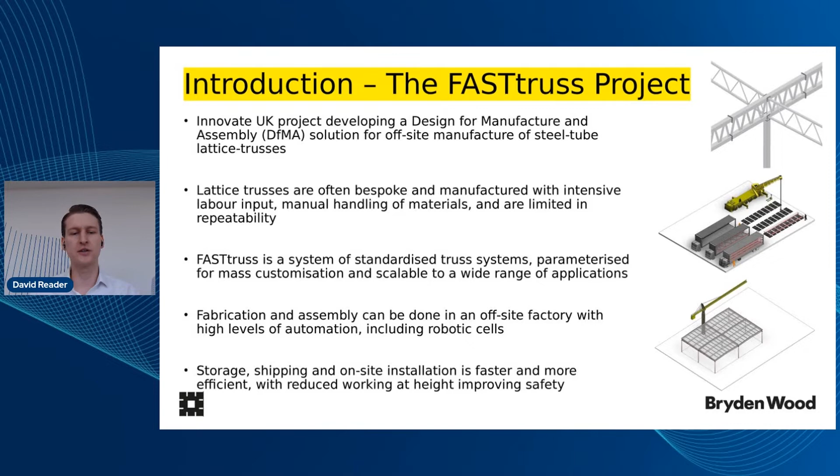What this means is that fabrication and assembly of these products can be done in off-site factories with higher levels of automation than you typically find in construction, including things like robotic cells. It also means that the storage, shipping, and on-site installation is faster and more efficient, with other benefits such as reduced working at height, so it improves things like safety.

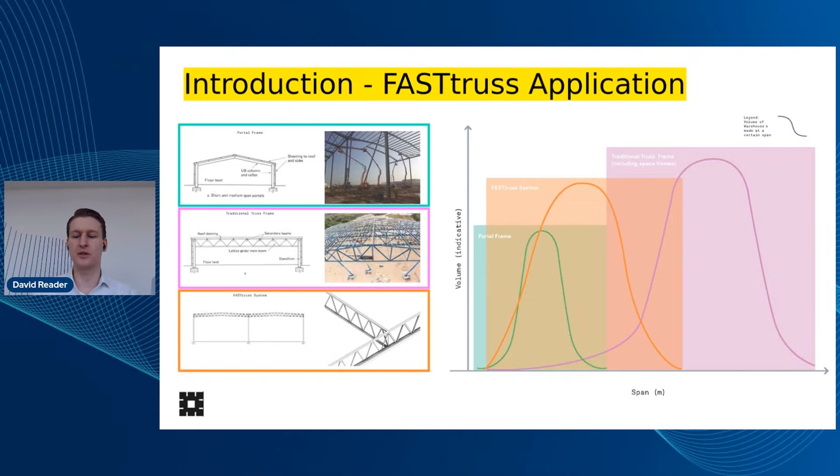So talking a bit about the application for this system, where it sits in the market. There are a few different types of systems already out there, things you'll see on the left, say a portal frame or a traditional truss system, and they cover varying spans of the market. FASTtruss sits somewhere over the portal frame area, and it covers a bit of a gap in the market. It covers a wide span of buildings, and actually, a lot of the market can be covered with products such as this.

As I previously mentioned, this is a collaboration between Tata Steel, a global steel producer, with lots of other projects such as this; Bryden Wood, a global multidisciplinary construction design consultancy; and the University of Sheffield Advanced Manufacturing Research Center, which does a lot of this research with manufacturing collaborators.

So let's talk a bit about why FASTtruss is important and how automation is transforming this industry. Construction industry productivity has had really little improvement for decades, whereas other sectors have had huge improvements in efficiencies. It's typically slow to adopt new processes and technologies, including simulation. Traditionally everything is focused on site, using bespoke elements, bespoke processes, bespoke workflows. This means there's poor efficiency and an inability to repeat and scale anything that happens.

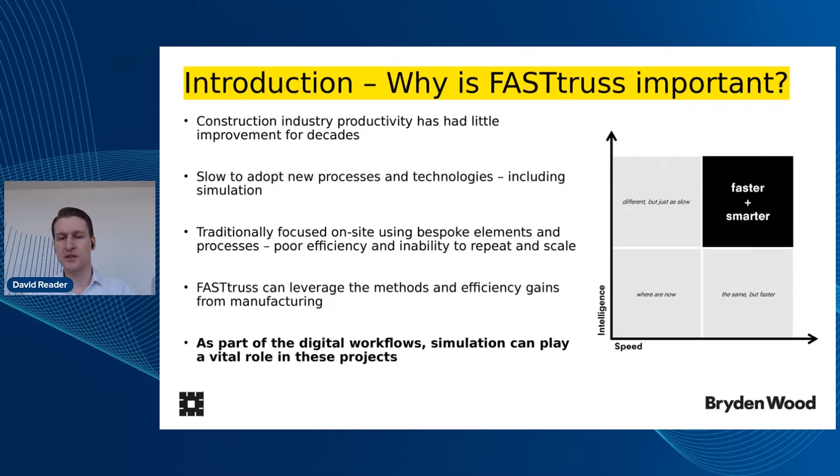So projects like FASTtruss can leverage methods and efficiency gains from sectors like manufacturing. And this is really great. It can transform the construction industry and change the way that projects and components are delivered. As part of these digital workflows in the design, we believe that simulation can play a vital role. So we want to be faster and smarter. Not the same thing, but faster, or not just different and just as slow.

So when we're talking about simulation, why would we choose AnyLogic? Basically, in collaboration with Tata Steel and the AMRC, we developed a simulation of the factory system. We chose AnyLogic as the software because its built-in libraries provide a fast and flexible platform for development, which is really important for us, especially the rapid building of simulations. The simulation is built using knowledge from existing mathematical models, and this allowed further dynamic analysis. As we said before, we believe simulation is a core approach in the future of the construction industry.

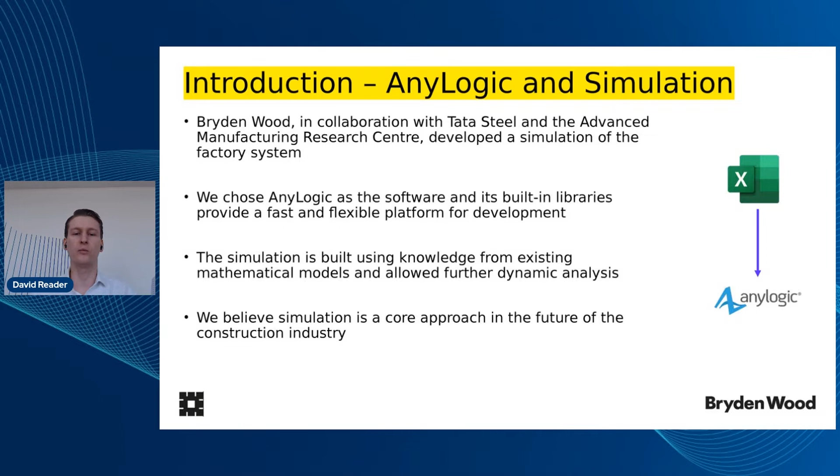Traditionally, a lot of work is done with static models, static spreadsheets, Gantt charts, tacit knowledge, intuition. What we want to do is change that, and we believe that simulation and tools like AnyLogic can really build on that knowledge and become a core part of the tools in the future. So where we want to make an impact, and where we do make an impact in these projects, is trying to be at the early stage. Traditional projects or conventional approaches don't test many options.

They take a long time to do it. They don't iterate much. Then there's not a lot of feedback in the process. Whereas for our approach, or what we try to do with clients, which is kind of like the design to value methodology, is we create lots of options, help clients make choices, connect client requirements with resulting outcomes and solutions.

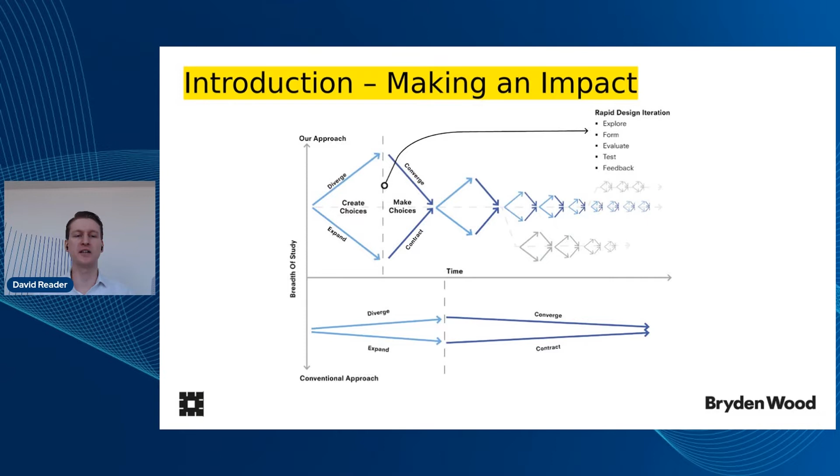And what we're trying to do is basically push simulation tools into this process, into an industry that's quite behind, and also push simulation further up that design flow, so that we're deploying it at much earlier stages than we otherwise might have. So the truss itself is kind of designed with an automated design workflow.

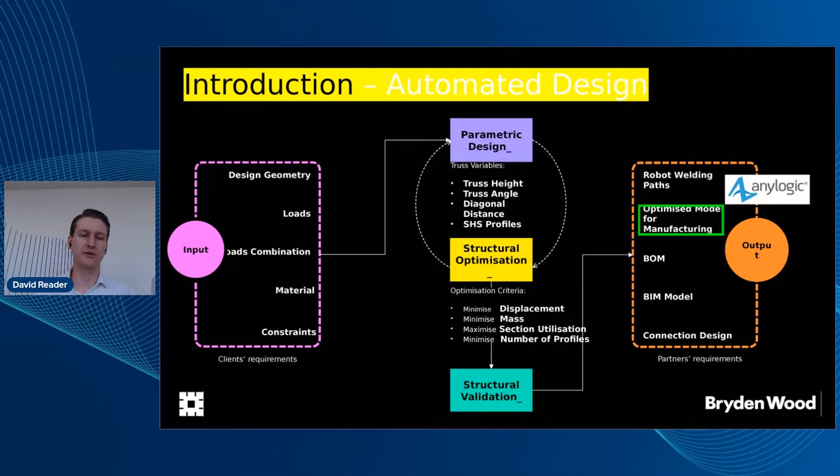We take inputs from clients and from the market, and there's a parametric design, structural optimization that designs this truss system, provides feedback. And as part of this workflow, we get outputs, models, designs, bill of materials, but part of that is an optimized model for manufacturing. So the actual factory that would fabricate these trusses off-site, and that's where we've used AnyLogic.

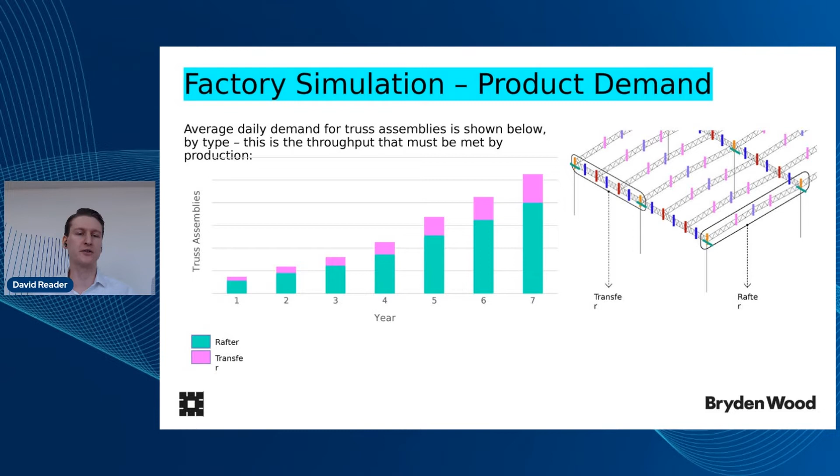And so it kind of shows what the system or what factory would actually have to achieve in terms of throughput. And that's kind of connected to what we do. So we can show or demonstrate whether one factory would be sufficient, whether it's two factories, or what portion of demand and how could a factory actually provide these trusses to market.

So a bit about truss anatomy before I go on, using the image that I had before. So there's three main elements to a truss. There's the long top and bottom bits, which are called chords. They're made from square hollow section steel, so essentially square steel tubes. Braces are the shorter diagonal elements, and they're made from the same materials. And then we have connections, which hold the different parts of the truss together, and they're made from plate steel.

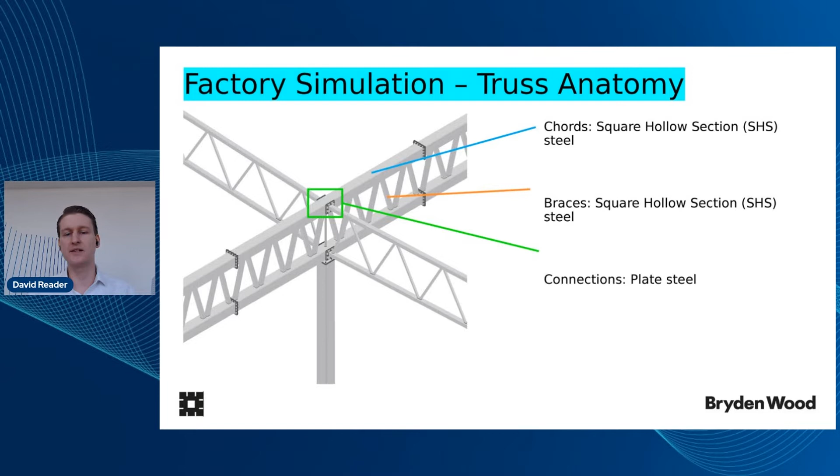So the methodology that we use to approach this problem, the simulation structure was based on the latest process flow and facility layouts which had been developed by the design team. We decided to limit the model scope from raw material entry into the system to basically a general buffer at the end, which collected finished trusses after the final process step. So for this initial analysis, we wanted to focus just on the core processing elements.

The inputs that we used for the model will probably be familiar to pretty much everyone here, I'd hope. But things like the process flows, cycle times and timings, different truss types, dimensions, their parameters, production schedules, logistics, and other data.

And then we had a set of outputs which had been agreed with the project team and the clients. So things which would impact the viability of the factory and the process technology selection, etc. So things like accumulation sizing of buffers, processing stations, throughputs, and some indications of bottlenecks.

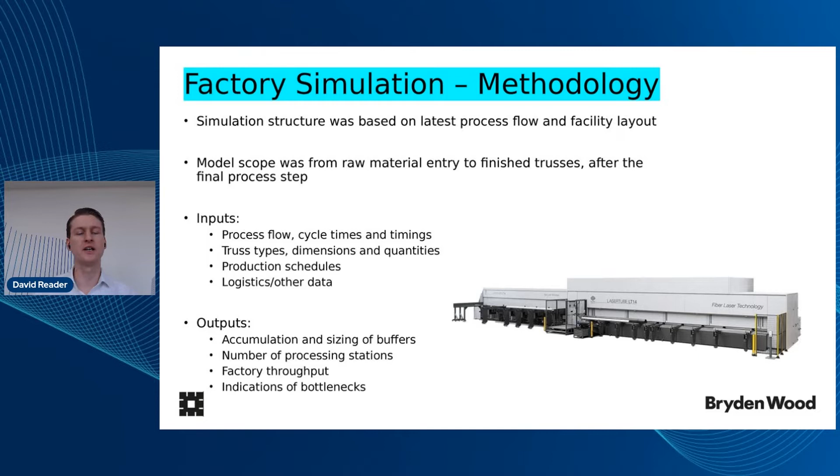So the general process flow was split into two streams. One of that is for plate steel, the connections line, and the other is for the square hollow section steel, so the steel tubes. Typically, the raw material comes in, it's cleaned, inspected, measured, marked, and then processed. So it might be cutting, drilling, and then it's welded together. It's inspected and tested again, and then it goes for painting and finishing.

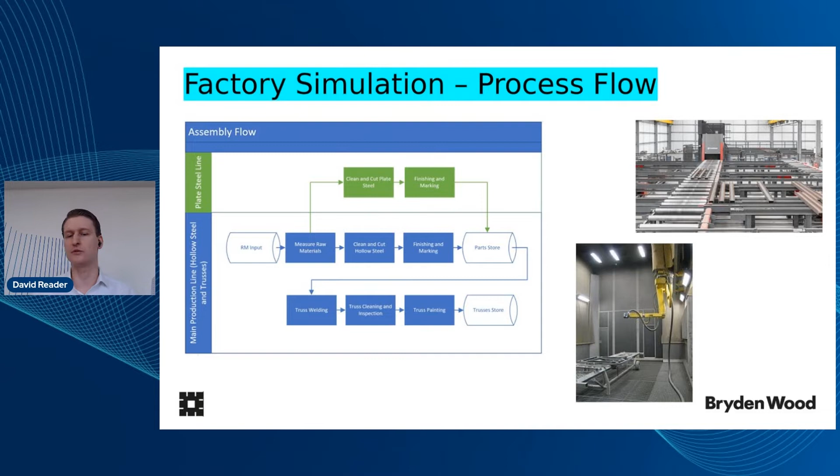And the images on the right just give you an idea of the types of equipment that would be in this facility. So for these proposed factories, it would be conveyors for large raw materials, or maybe robotic cells which do operations such as shot blasting or welding.

So this is an approximate layout of the factory. So you have raw material inputs, cleaning, measuring, transferring, then three different processing streams for brace processing, plates processing, chord processing, and then there's truss welding, which we had as robotic cells.

There's truss buffers, cleaning and inspection, and then two large sections which are for painting. So these are priming painting, and then intumescent, which is fire-resistant painting. And these areas are actually more manual, and they are for finished trusses.

So these trusses are many meters long. They're very large. They take up a lot of space. So this is one focus of the model and of the project, because it means a lot in terms of resourcing and cost.

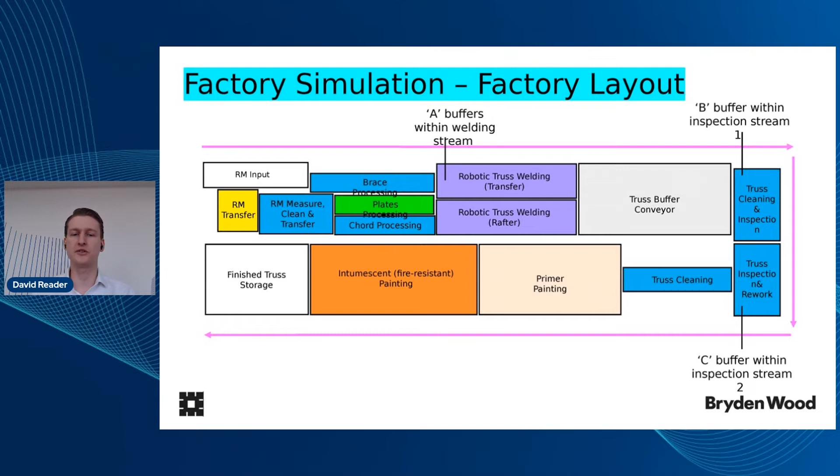And there were a few buffers that we looked at within the process, which we basically call A, B, and C, but they're within the truss welding, within the inspections. So those are the areas that we recorded.

So this is a bit on how we converted the simulation to AnyLogic. So we took that process flow. We mainly used the process modeling and material handling libraries, which was really useful because you can kind of just immediately use them. Conveyors we use for the main material transport routes. We could use conveyor stations to represent processing equipment, such as cutting, drilling, and inspections.

We represented the welding stations and the welding streams using a series of nodes, and cranes and forklifts were used to move material between these conveyor systems, different buffers, and processes like painting and storage. So lots and lots of cranes, but there are a couple of diagrams and images below that show you just how we represented different processing streams within the model.

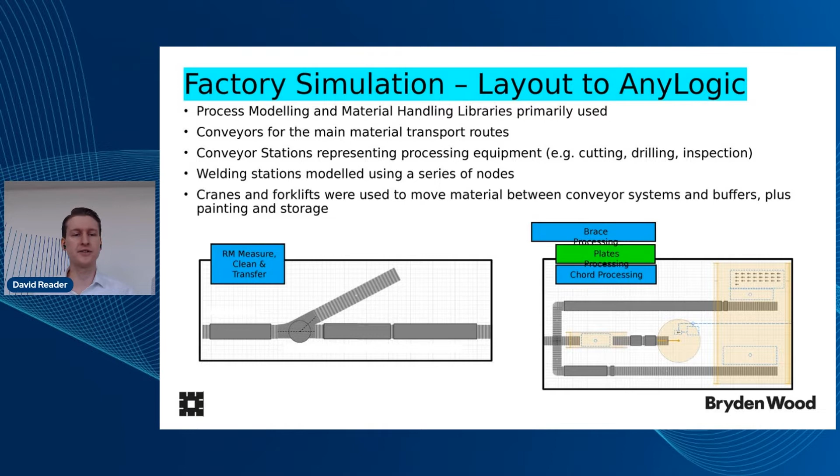So you had a sequential set of conveyor stations, maybe for measuring, cleaning, transfer, and then on the right you've got the three different streams, and you can represent the correct capacities and dimensions of all of these things quite easily, which is nice.

And similarly, transferring the materials themselves to agents, we decided to simplify the problem a little bit, and rather than process every single raw material piece and raw material element, we decided that we would batch them together, which we agreed as a project team would be an okay representation for the way that the system would work in reality. So we would put all of the chords together, which would make up a single truss type, all of the braces, all of the plates.

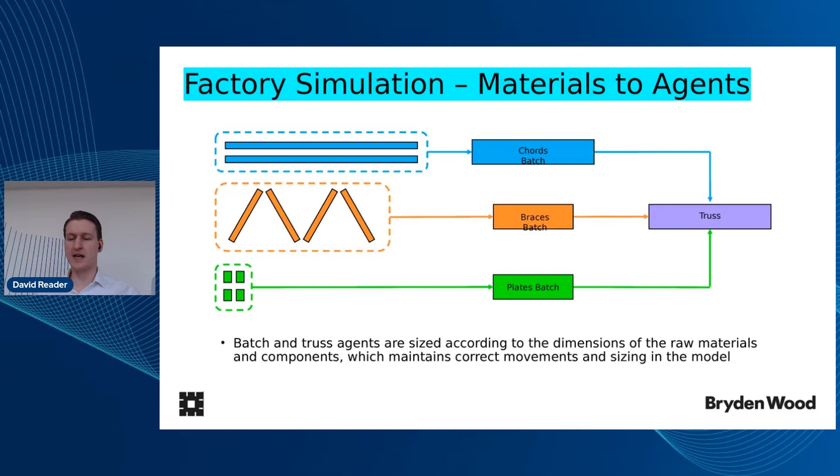And so they were converted into individual batches with the correct parameters, the correct dimensions, and those were generated in the model based off the production schedule. And then they would be processed through the different streams, depending on what types they were. And eventually they would get welded together and become a truss agent or a truss shape within the model, which would then go through the rest of the processing steps.

So some assumptions and data that we used, probably some typical things, but as it was quite an early stage initial model, we did have to make some quite high level assumptions, which is pretty typical, but they're things that we can share with the project teams and develop as we go along. So things like only considering core process timings, no constraints on availability of resourcing, no breakdowns, maintenance, we could operate 24/7.

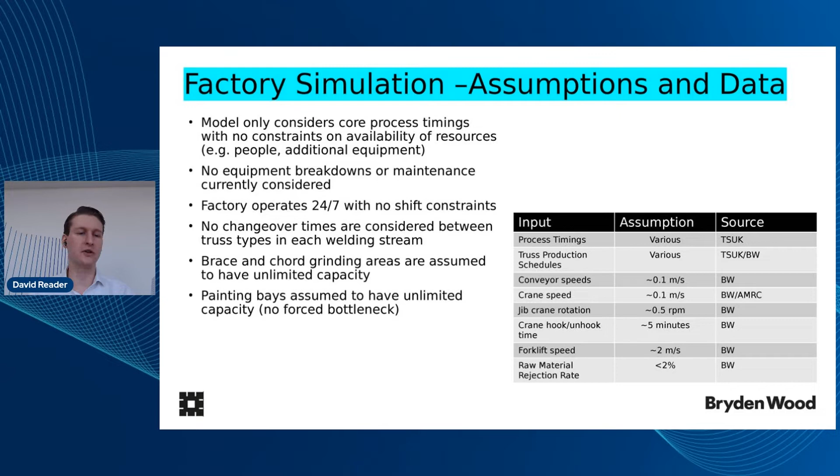And then we removed the limits and constraints off of some of the different areas, so storage areas and painting bays and things like that. We didn't want a bottleneck. We wanted to see what the maximum usage was there, what the accumulation was there. Just on the right to show roughly the kinds of data that we're using, some of these provided by us, provided by partners. But again, shared between the project teams, easy to share, and something you develop as you go along as part of that iterative process.

What the simulation also allowed us to do was easily test lots of different scenarios. So we had a few different scenarios here, just to test the spread of outputs that we could get, the impacts of certain inputs on the system. So things like transport times, whether we included them or excluded them. Obviously, totally excluding transport times is not going to be really realistic, but we wanted to get a best case boundary output to see what impact it would have on the model.

We had our process timing, so we had our default static values, and then we also added in a plus or minus 20% triangular distribution on certain scenarios, and then also for the production schedule. So depending on the actual lifting methodology of the final truss system, that changes the necessary production schedule in the factory, and we assumed that the production schedule in the factory would mimic the installation schedule on site. So whether it was lifted from above or lifted from below, that gives you a different production schedule, and it changes the variability and the number of campaigns within the process.

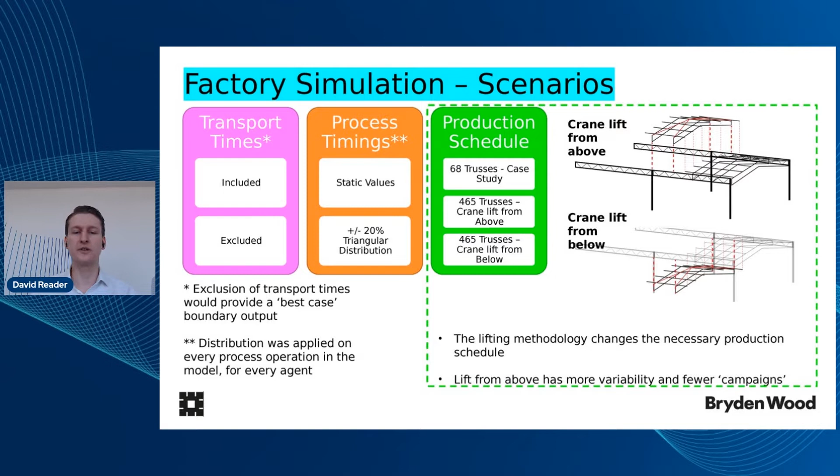And we also had different case studies, so that was a smaller building and then two larger buildings. So I do have a video demo, I think, that I can play.

Sorry, I'm just having a bit of difficulty playing the video.

Sorry, just having a little bit of difficulty playing the video there. But basically, this shows how the model itself was structured. So you can see the similarities with the factory flow, which I showed before, and how this was represented within the system.

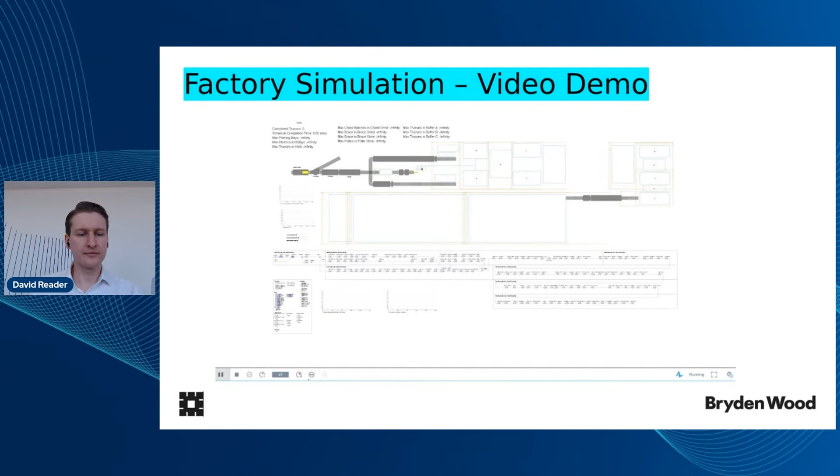Okay, so a bit on the results. Again, I've removed the numbers due to sensitivity reasons, but essentially the main outcomes were that the schedule and process time variations only made very minor differences to the results. As expected, the most difference to the results was the inclusion or exclusion of transport times. And that means it's something that we can focus on in a subsequent analysis.

One of the other findings was how much of the demand could be fulfilled by one factory such as this. So it gave the stakeholders and also the project team an idea of how much of the demand could be covered by one factory such as this with these assumptions at this early stage, and how many you might need in total to cover your predicted demand.

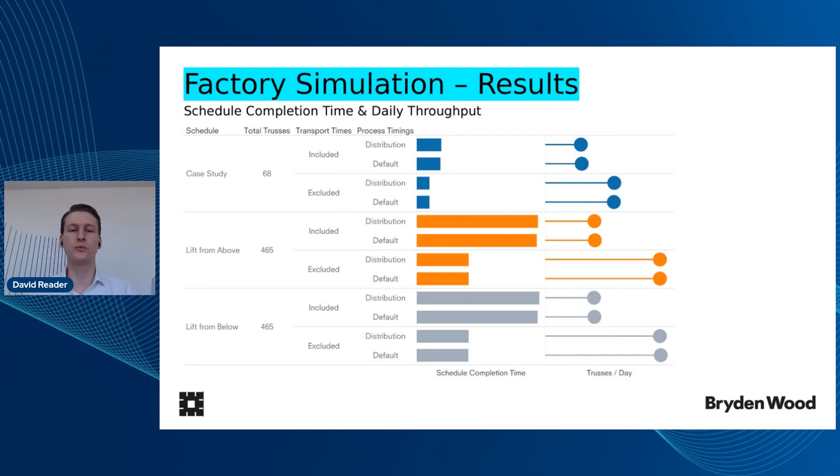So we also looked at the sizing of hold, priming, and the secondary fire-resistant intumescent painting areas. One thing that we did find out was that production schedule had a larger impact on the sizing of buffers and these holding areas, which is important for facility sizing, so resource requirements and cost. The most important aspect for us was checking outputs against existing modeling that had been done and the results that had already been found.

This is used for early costing and viability studies. And what we found was there were closer matches for the model for the priming stations, but for the intumescent stations, the AnyLogic model suggested that more bays should be allocated. And with these trusses being very large, that equates to a lot of factory space.

In this case the painting processes are labor intensive. There's lots of drying times and cranes that are used to move them around. So the more bays you have, the more equipment you need, the more space you need, the more people you need, the more complexity you have. So it's good to find that out at an early stage, whether you are undersizing or oversizing things. So that was one interesting finding that we had.

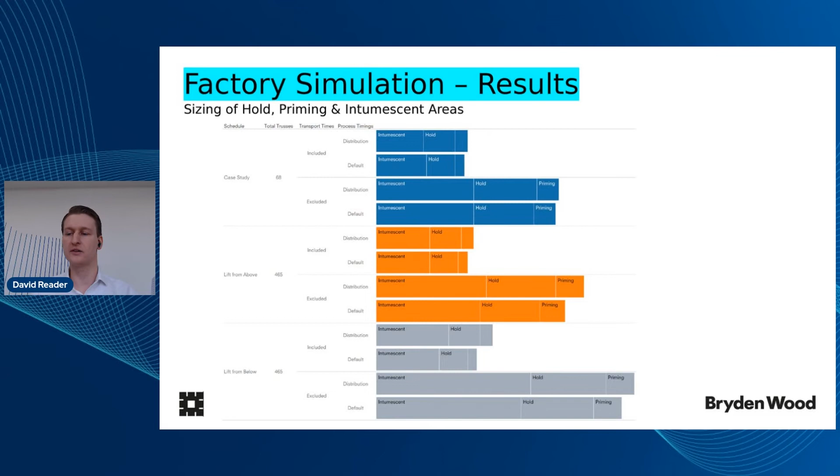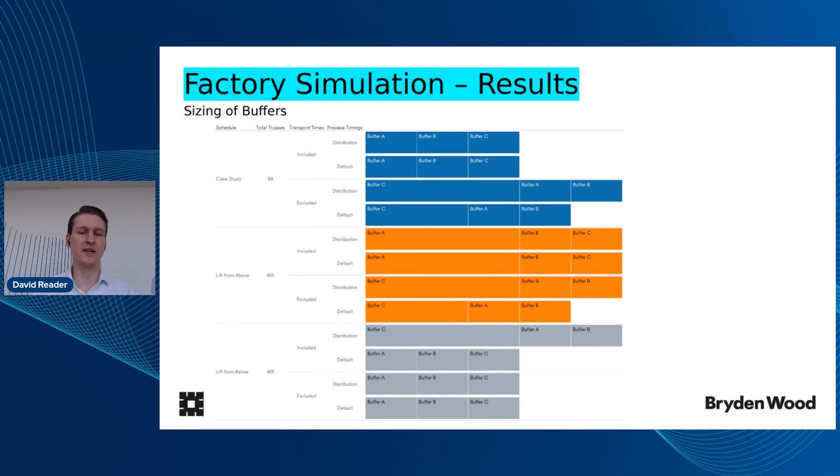Generally, the sizing of buffers, which I highlighted earlier, was more constrained by the other parts of the process, so there weren't really many variations in the results. But again, it does provide a little bit of confidence or indication that it's generally fairly sized. You're not orders of magnitude out, and it provides a little bit of confidence to stakeholders and project teams that you do have the right initial assumptions.

So overall, a bit of a summary of the findings. Based on the initial assumptions and the data that we used, some area sizings and throughput figures were similar to what had been predicted by the project team, which provided a bit of confidence there. However, the simulation did indicate that other areas could require additional stations, space, or bays, such as painting, and therefore it highlighted areas for further investigation, areas for risk. And it makes a big difference at these early stages for viability studies, technology options, and things like that.

The variation in process timings only resulted in slight output variations, so it indicated potential acceptable ranges when considering equipment and process options, and also general error. At early stages, lots of things are quite unknown. You have to make assumptions or guesses for the data inputs, and if you change them by plus or minus 20% or 30%, and you're not really changing the system that much, that's fine. So it gives everyone a bit of leeway and confidence that they can make some of those changes. They can look at alternative technology options, and it doesn't really affect the end result that much.

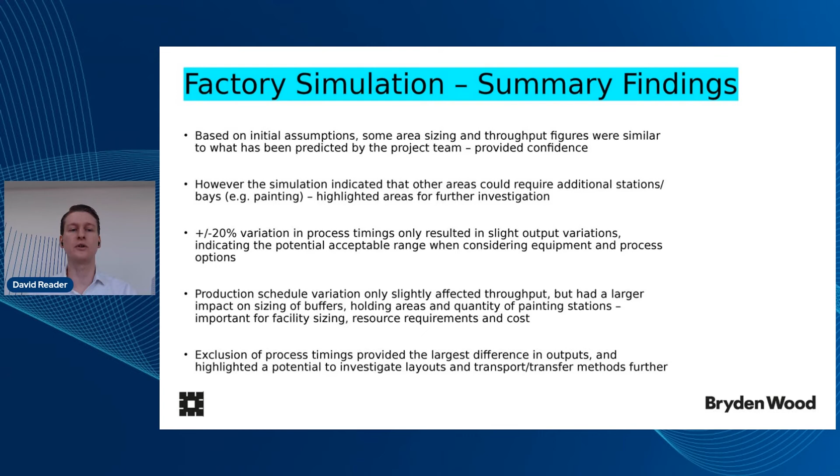The production schedules that we looked at only slightly affected throughput, but had a larger impact on sizing of buffers, holding areas, and quantity of painting stations, again important for facility sizing, resource requirements, and cost. And exclusion of process timings, as expected, provided one of the largest differences in outputs, and highlighted a potential to investigate different layouts, transport timings, and transfer methods further. So what if you could reduce or eliminate some? It means that you might be able to get some good throughput gains.

And generally, thinking of where next for this process. So you can do iterative reviews and updates of the input data and modeling results, which is great. And with tools like simulation and AnyLogic, that's really easy. For this, and I'm sure for a lot of models, it's just a case of swapping out one input file for another, running, and then you can basically just generate a new set of outputs that you can then visualize.

What you can also do is further investigation, maybe with the model that you already have, or with some minor tweaks. So again, looking at things like production schedules. We've included 2 or 3, but are there more? How does it change? Are there any production schedules that would really make a difference to your simulation? What's the most efficient production schedule?

Things like different facility layouts. The facility layout that we tested was just one of the initial ones, but there were alternatives, which may be down to the type of site that you want to fit on, whether there are any site constraints, these kinds of things. Again, moving things around in the model is something you can do. Different automation and different technologies. So replacing some of the stations that we had with different technologies, which means different timings, different processes. Again, something that's quite easily done and represented in the model.

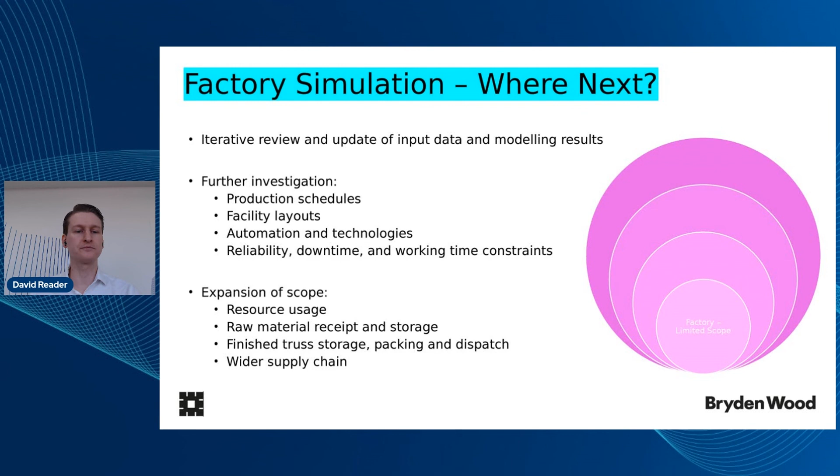Okay, so just looking at questions. Is there some optimization in the model? Currently we don't have any optimization functionality in the model, but it's something that we're really interested in and pushing as part of the expanded scope for these types of simulations. Within the industry, as I mentioned, it's still not really widely used or widely adopted. So what we're trying to do is take projects like this, put in simulation, see where it works and see how it can help answer some questions.

So there are definitely things that we could do in terms of optimization. That could be a way of feedback for the production schedule. We know how many trusses you have to make, for example, for a particular type of building. You could have a feedback between some metric, some output that you're trying to optimize against. You could test lots of different production schedules and make that smart to reach an optimized production schedule or some other factor.

Do you think your case can be applied to address similar problems? I think what we try and do is generalize, or hope to generalize, the approach, rather than make these specifics. Something like AnyLogic and simulation is quite flexible, quite generic. And the learnings that we get and the way that we build the models, we often reuse for different clients and different sectors, and it's very similar to manufacturing. So I'd like to hope that there's a lot of transferability there.